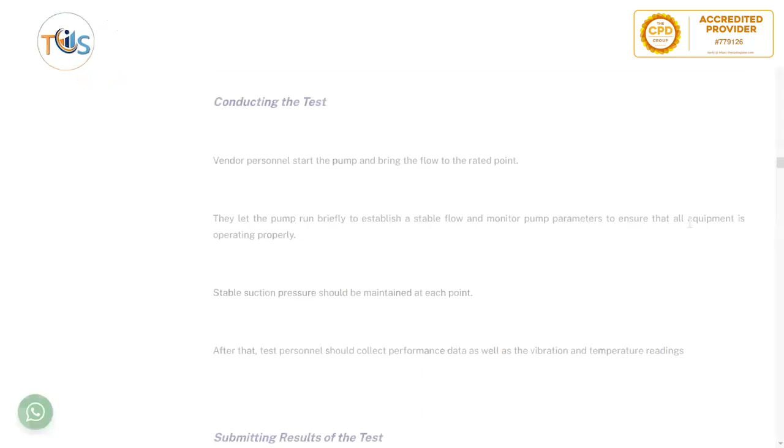Conducting the test, vendor personnel start the pump and bring the flow to the rated point. They let the pump run briefly to establish a stable flow and monitor pump parameters to ensure that all equipment is operating properly. Stable suction pressure should be maintained at each point. After that, test personnel should collect performance data as well as the vibration and temperature readings.

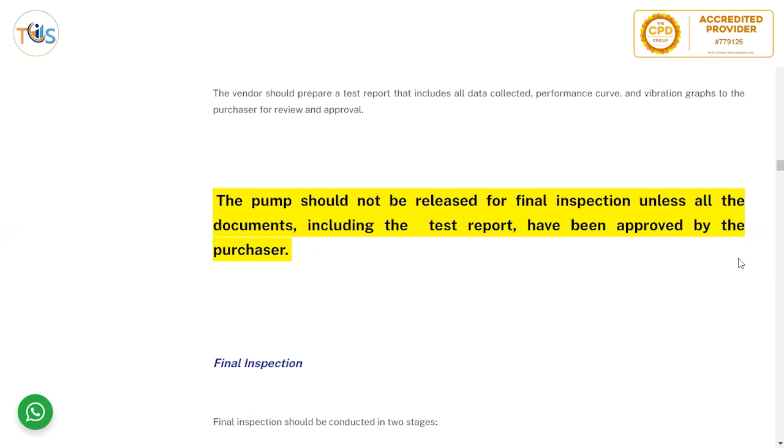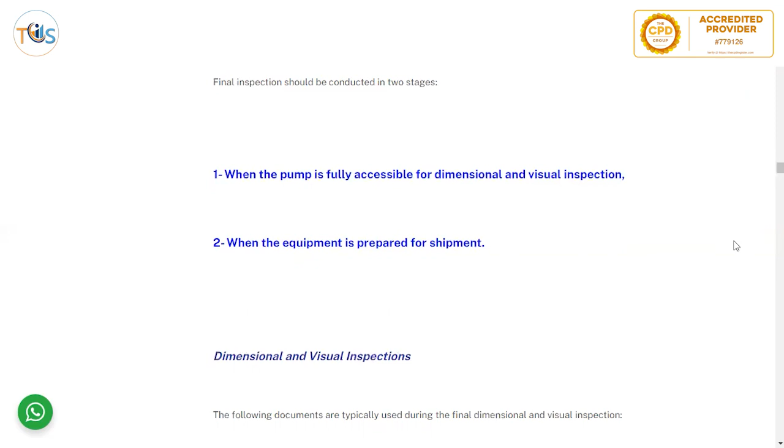Submitting results of the test, the vendor should prepare a test report that includes all data collected, performance curve and vibration graph to the purchaser for review and approval. The pump should not be released for final inspection unless all the documents, including the test reports, have been approved by the purchaser. And final inspection should be conducted in 2 stages: 1, when the pump is fully accessible for dimensional and visual inspection, and 2, when the equipment is prepared for shipment.

The following documents are typically used during final dimensional and visual inspection: data sheet, pump train general arrangements, auxiliary pump general arrangement, P&ID, process and instrumentation diagram, bill of material for seal reservoir, LOS, seal, driver, junction boxes, packing list.

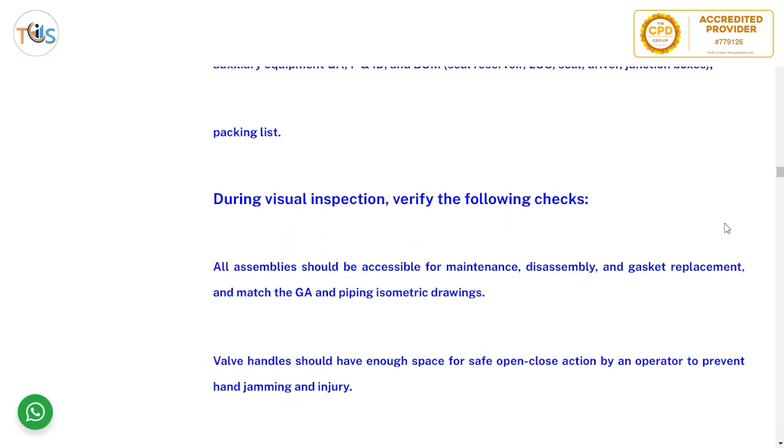During visual inspection, verify the following checks. All assemblies should be accessible for maintenance, disassembly, and gasket replacement, and match the general arrangement and piping isometric drawings. Valve handles should have enough space for safe open-close action by an operator to prevent hand jamming and injury. All equipment should be mounted securely and according to the drawing. Workmanship of installation, welding, wiring should be without visible defects and comply with standards.

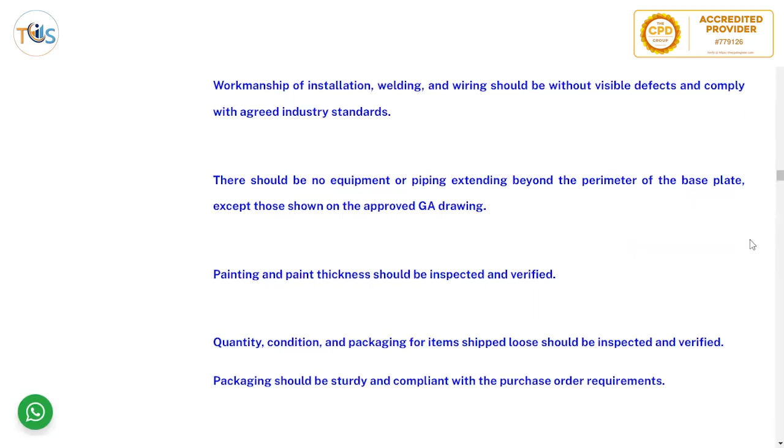There should be no equipment or piping extending beyond the perimeter of the base plate, except those shown on the approved GA drawing. Painting and paint thickness should be inspected and verified. Quantity, condition, and packing for the items shipped loose should be inspected and verified. Packing should be sturdy and compliant with the purchase order requirement.

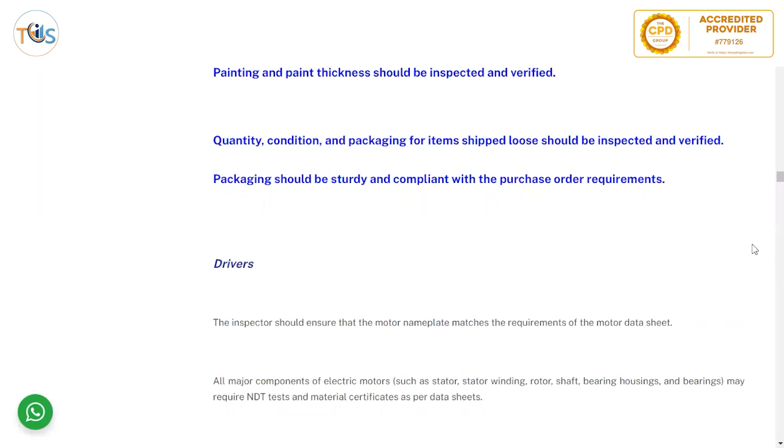For drivers, the inspector should ensure that the motor nameplate matches the requirement of the motor data sheet. Major components of electrical motors such as stator winding, rotor, shaft, bearing housing and bearing may require NDT and material certificates as per the data sheet. Ensure that material certificates and NDT reports have purchaser approval.

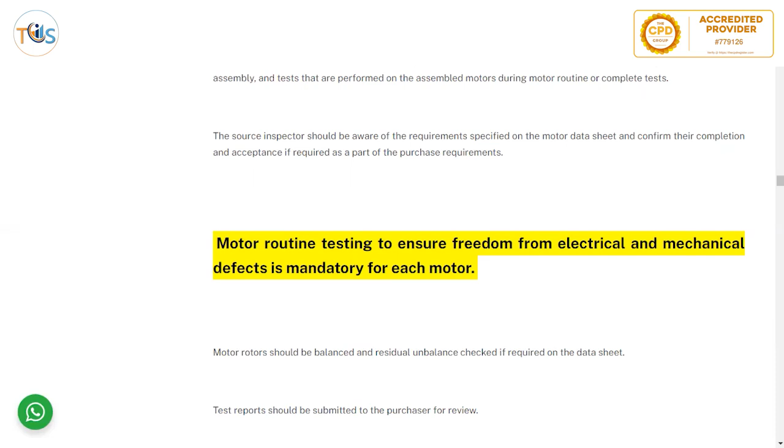There are electrical insulation tests that are performed on motor parts such as stators and windings before the motor assembly, and tests that are performed on the assembled motor during motor routine or complete test. The source inspector should be aware of the requirements specified on the motor data sheet and confirm their completion and acceptance if required as part of the purchase requirement. Motor routine testing to ensure freedom from electrical and mechanical defects is mandatory for each motor. So each motor needs to be tested.

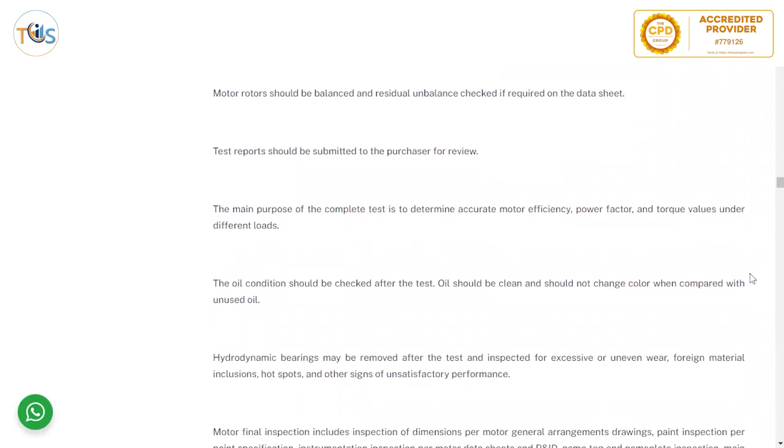Motor rotor should be balanced and residual unbalance checked if required on the data sheet. Test reports should be submitted to the purchaser for review. The main purpose of the complete test is to determine accurate motor efficiency, power factor, and torque values under different loads. The oil condition should be checked after the test. Oil should be clean and should not change color when compared with unused oil. Hydrodynamic bearings may be removed after the test and inspected for excessive or uneven wear, foreign material inclusion, hot spots, and other signs of unsatisfactory performance.

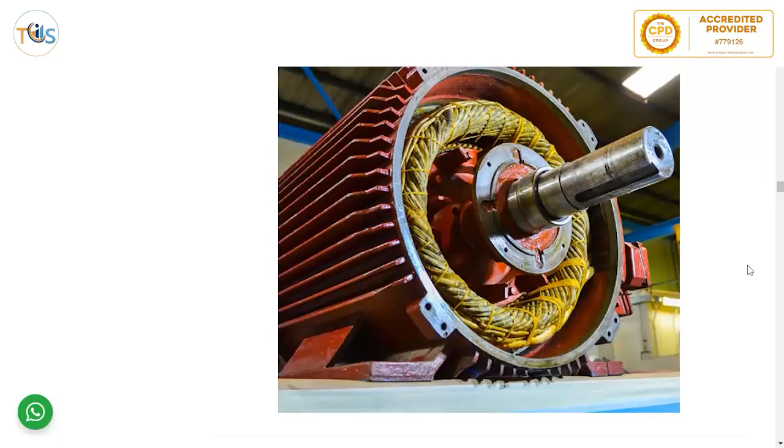And motor final inspection includes inspection of dimensions per the motor GA drawing, paint inspection, instrumentation inspection per motor data sheet and P&ID, name tag, nameplate inspection, main terminal. So here this shows the shaft of a motor plus the stator and rotor and the casing in the electric motor.

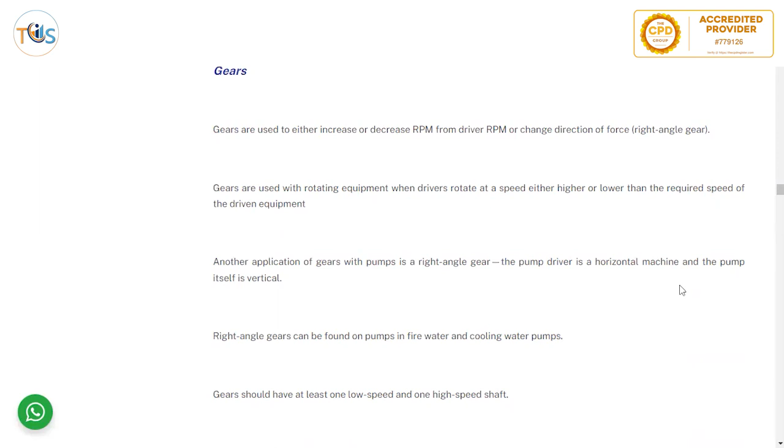Gears are used to either increase or decrease RPM from driver RPM or change direction of force. So they just sort of synchronize or direct the force of the pump. Gears are used with rotating equipment when drivers rotate at a speed either higher or lower than the required speed of the driven equipment. Another application of gears with pumps is the right angle gear. The pump driver is a horizontal machine and the pump itself is vertical. For example, right angle gears can be found on fire water and cooling water pumps.

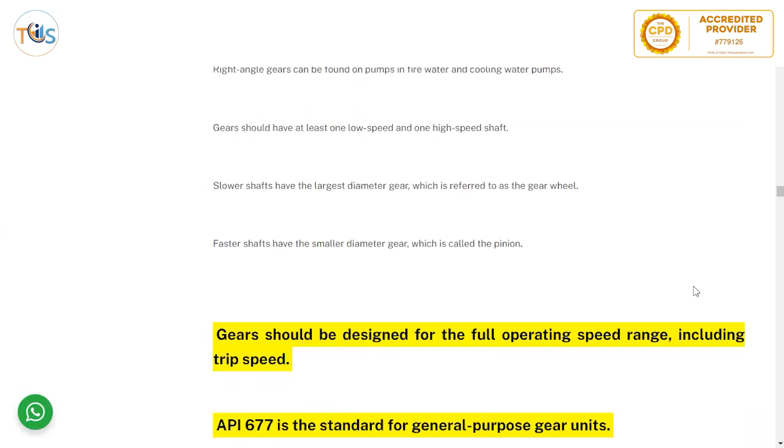Gears should have at least one low speed and one high speed shaft. Slower shafts have the largest diameter gear, which is referred to as the gear wheel. Faster shafts have a smaller diameter, which is called a pinion. So that's why they got wheel and pinion, the gears. Gears should be designed for the full operating speed range, including trip speed, and API 677 is the standard for general purpose gear units.

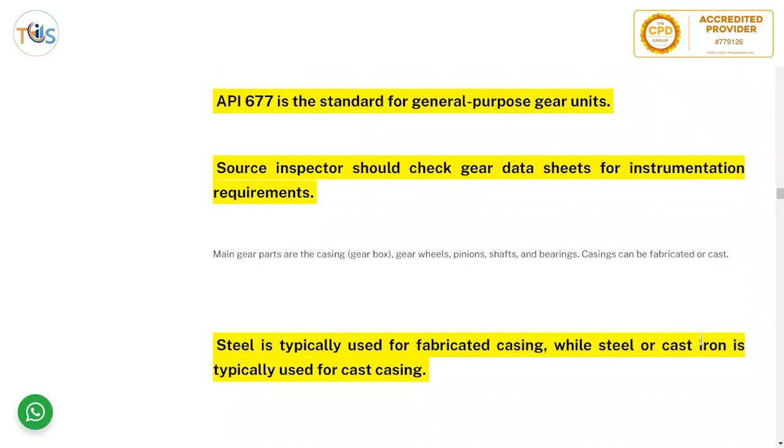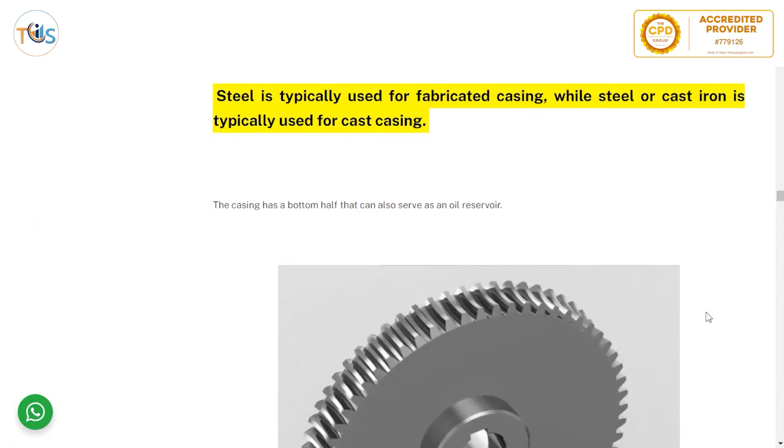Source inspector should check gear data sheets for instrumentation requirements, and main gear parts are casing, gearbox, gear wheels, pinions, shafts, and bearings. Casings can be fabricated or cast. Steel is typically used for fabricated casing, while steel or cast iron is typically used for cast casing. The casing has a bottom half that can also serve as an oil reservoir.

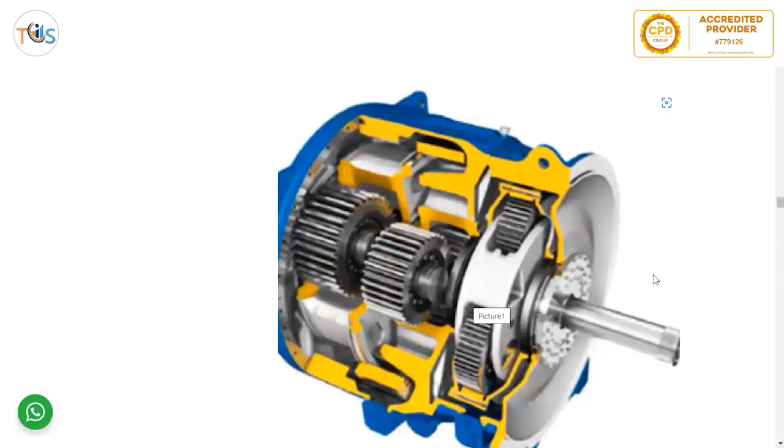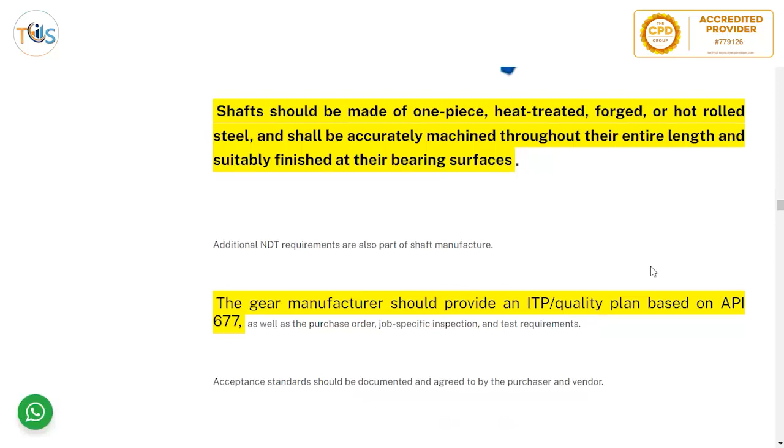Gear casing should be given a fluid fill leak check to test for oil tightness, and gear pressure lube oil system components should be given a hydrostatic test. The typical gearbox shaft should be made of one piece, heat treated, forged or hot rolled steel, and shall be accurately machined throughout the entire length and suitably finished at their bearing surface. Additional NDT requirements are also part of shaft manufacture.

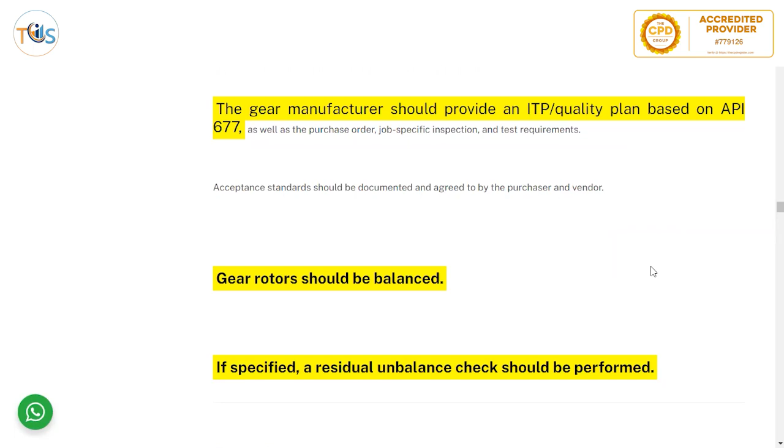Gear manufacturer should provide an ITP quality plan based on API 677, as well as the purchase order, job-specific inspection, and test requirements. Acceptance standards shall be documented and agreed by the purchaser and vendor. Gear rotors shall be balanced like a pump rotor. If specified, a residual unbalance check should be performed.

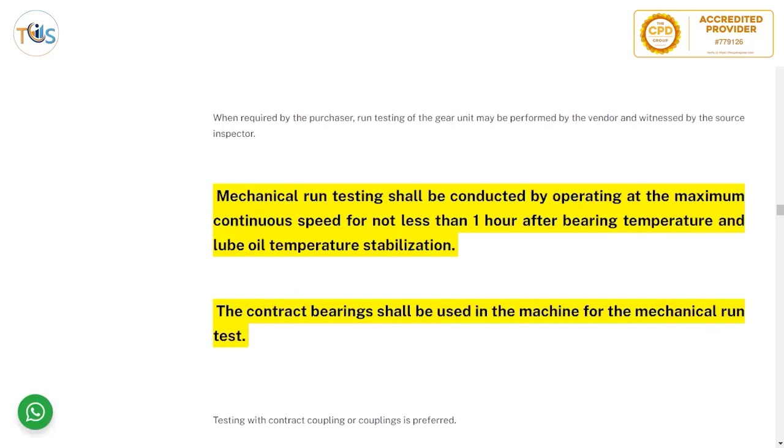Testing of gear. Mechanical run testing shall be conducted by operating at the maximum continuous speed for not less than 1 hour after bearing temperature and lube oil temperature stabilization. The contract bearings shall be used in the machine for the mechanical run test. Testing with contract coupling is preferred. During the run test, the mechanical operation of all equipment being tested shall be within the defined limits.

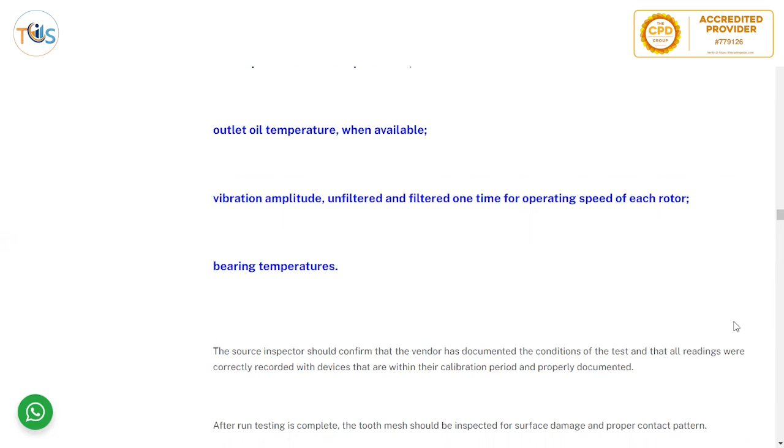The vendor shall keep a detailed log of the final test, making entries at every 15 minute interval for the duration of the gear test. Each entry shall record the following: oil inlet temperature, inlet pressure, outlet oil temperature, vibration amplitude, and bearing temperature. The source inspector should confirm that the vendor has documented the conditions of the test and that all readings were correctly recorded with devices that are within calibration period.

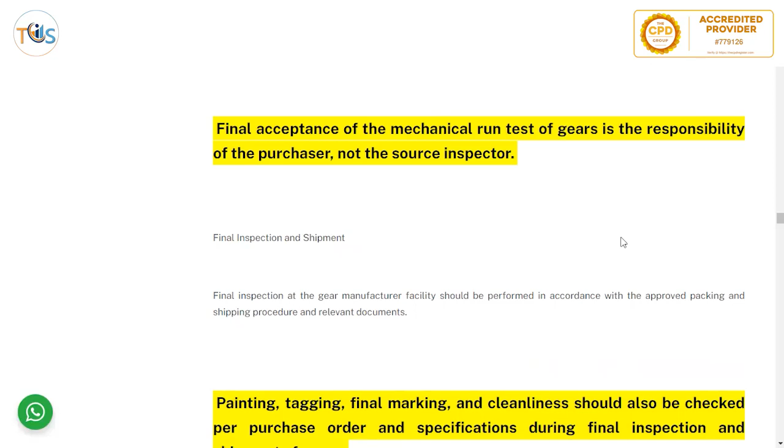After the run test is complete, the tooth mesh shall be inspected for surface damage and proper contact pattern using a blue dye, for example. When spare gear elements are ordered, each spare element should have a mechanical run test. So remember, the spare also gets a mechanical run test, and final acceptance of the mechanical run test of the gear is the responsibility of the purchaser, not the source inspector. So remember that you are not, as a source inspector, approving the mechanical run test.

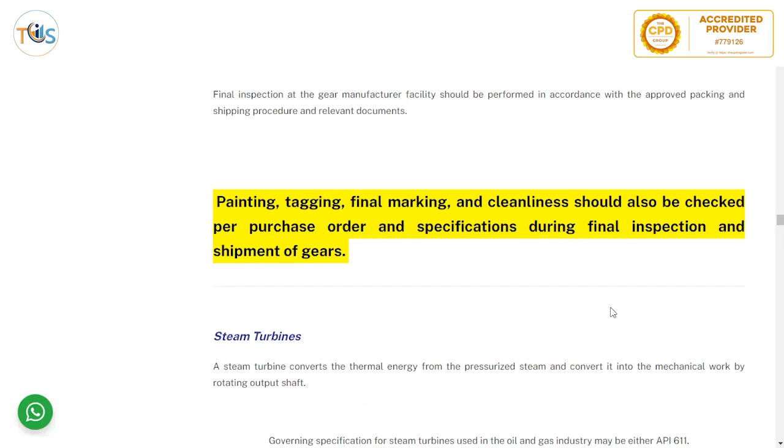Final inspection and shipment. Final inspection at the gear manufacturer facility should be performed in accordance with the approved packing and shipping procedure and relevant documents. Painting, tagging, final marking, and cleanliness should also be checked per purchase order and specification during final inspection and shipment of gears.

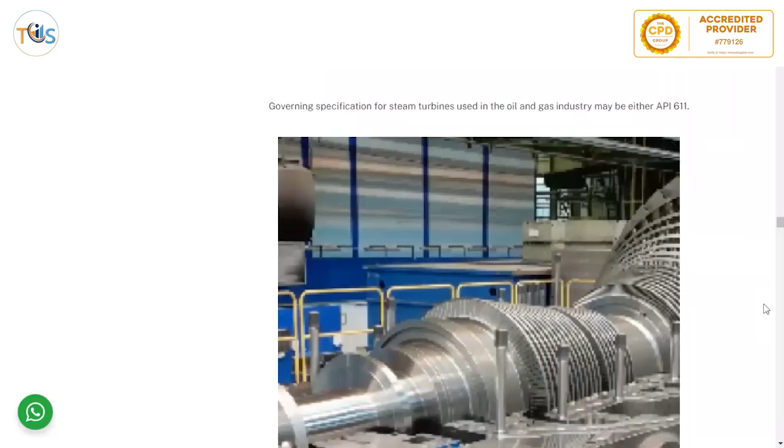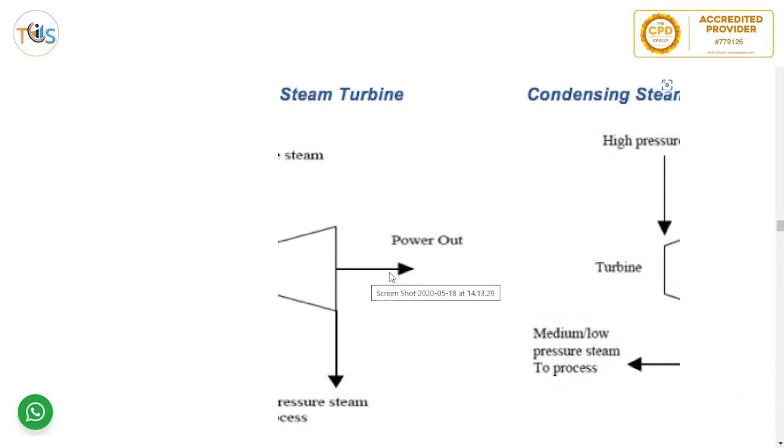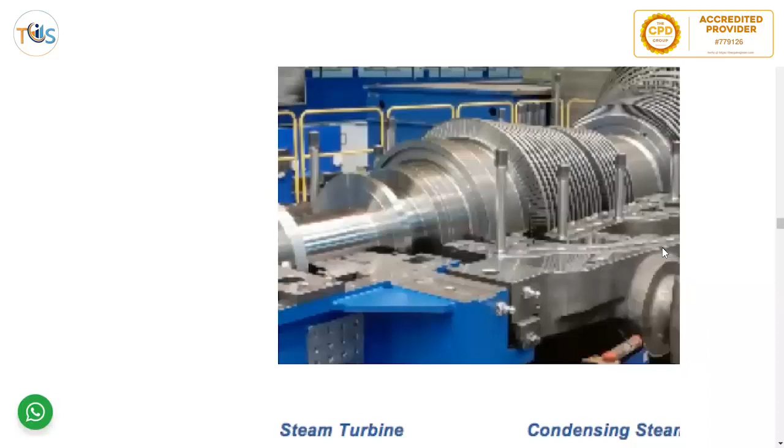Steam turbines. A steam turbine converts the thermal energy from pressurized steam into mechanical work by rotating an output shaft. The governing specification of steam turbines used in the oil and gas industry may be API 611. As you can see, the turbine works the reverse of a pump. So it is actually using pressurized steam and converting it to mechanical work. It's the other way around. So that's the steam turbine.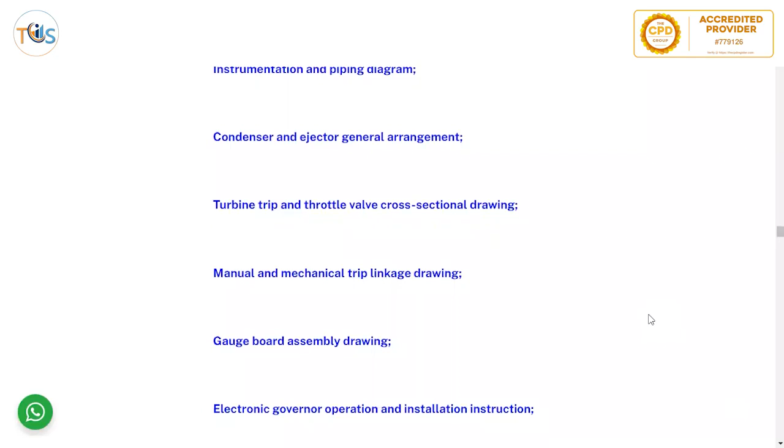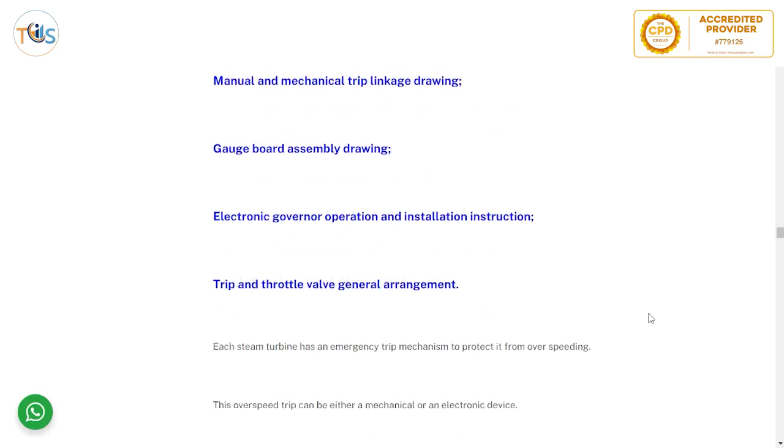The steam turbine vendor should provide the following documents that would be used during the final inspection: GA drawing, steam turbine datasheet, performance characteristic curve, instrumentation and piping diagram, condenser and ejector general arrangement, turbine trip and throttle valve cross-sectional drawing, manual and mechanical trip linkage drawing, gauge board assembly, electronic governor operation, trip and throttle valve general arrangement.

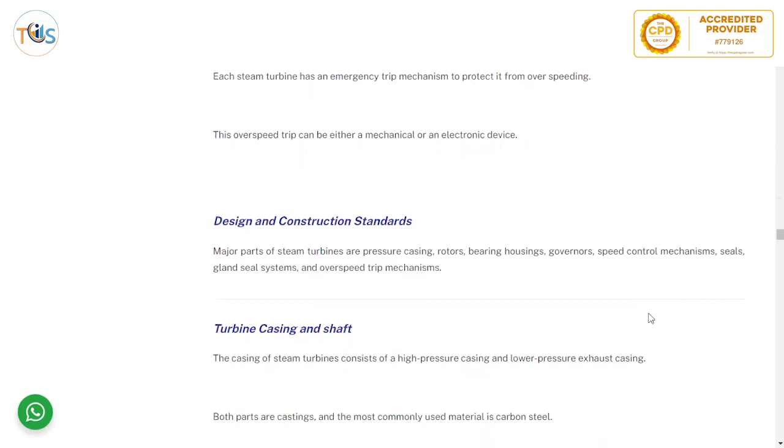Each steam turbine has an emergency trip mechanism to protect it from overspeeding. The overspeed trip can be either a mechanical or an electronic device. Design and construction standards. Major parts of a steam turbine are pressure casing, rotors, bearing housing, governors, speed control mechanism, seals, gland seal system, and overspeed trip mechanism.

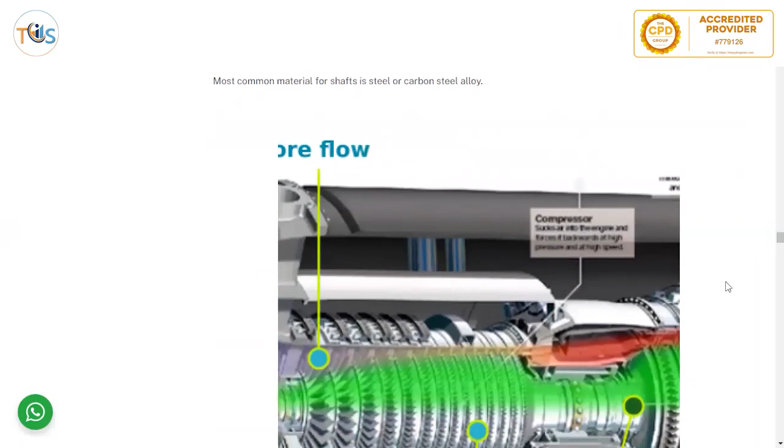The casing of steam turbines consists of a high pressure casing and lower pressure exhaust casing. For both casings, the most commonly used material is carbon steel. And the most common material for the shaft is steel or carbon steel alloy.

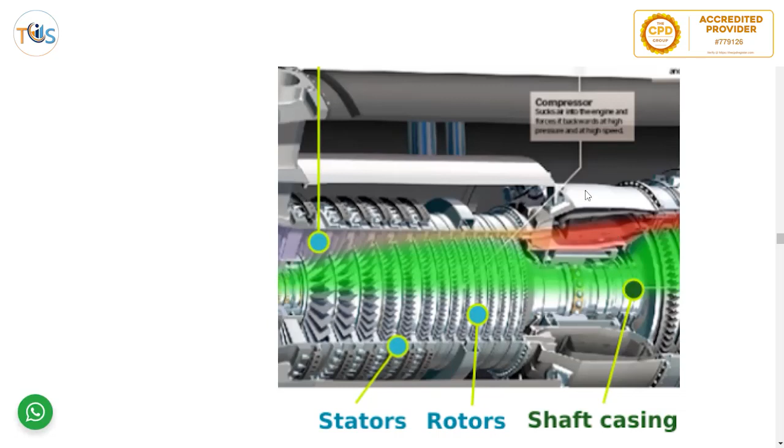As you can see here, this is a stator and rotor. One is stator, the other is rotor. This shows several stages, and then you have the whole casing that covers the entire steam turbine.

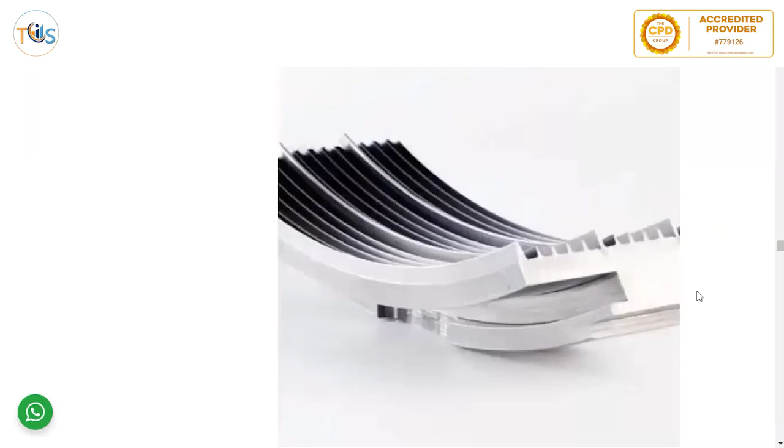Seals and packing. You can see here a close view of the seals. There are 3 or 4 different seals, one after another, for more reliability, and a carbon ring. This is another view of the seals and rings.

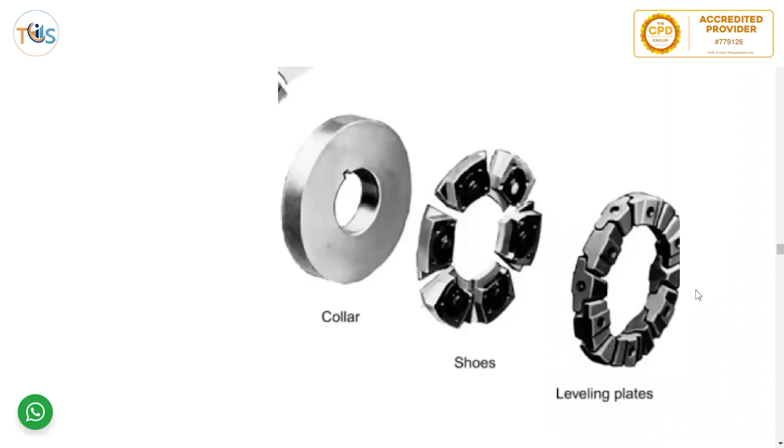And then you see a shoe and leveling plate. It's like a clutch in a machine, in a car.

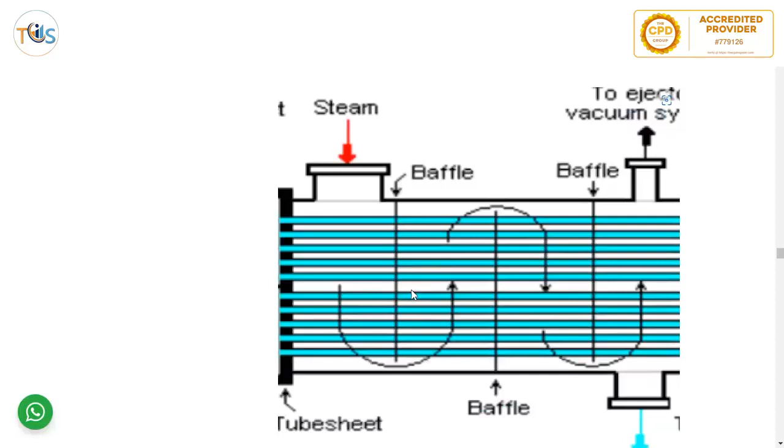Also here you see a condenser. It's like a heat exchanger with tubes. Steam comes in and then goes out from here, and the heat is absorbed here.

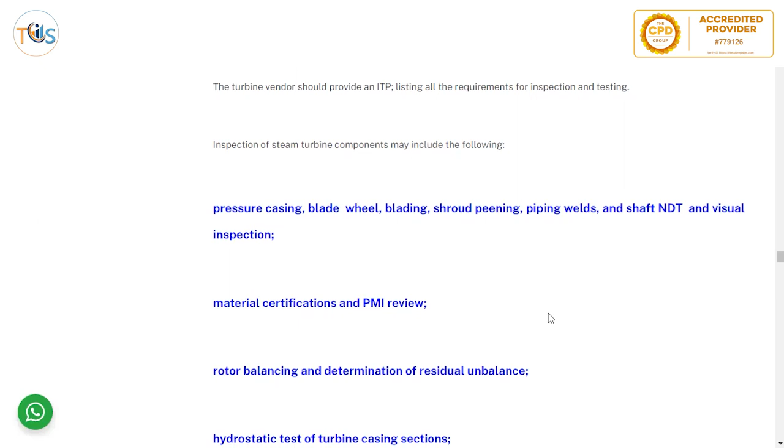Component inspection: the turbine vendor should provide an ITP listing all requirements for inspection and testing. This may include pressure casing, blades, wheel, all blading, shroud peening, piping welds, shaft and visual inspection, material certification, rotor balancing, hydrostatic test, cleanliness inspection of the assembled steam turbine, and auxiliary equipment inspection such as condenser and ejectors.

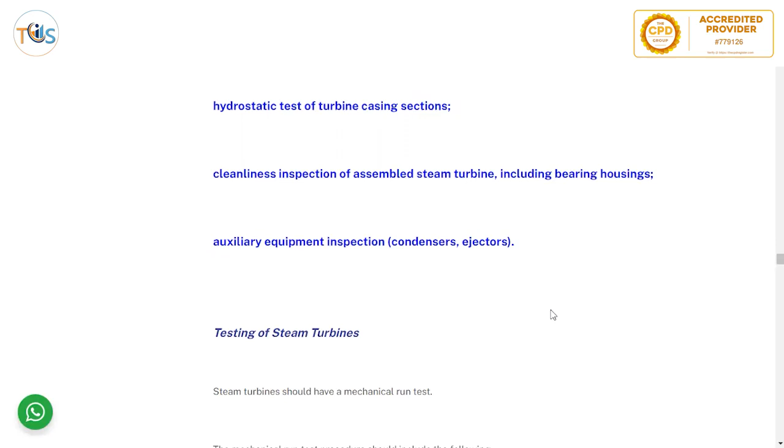Testing of steam turbines should include a mechanical run test. The procedure for the mechanical run test shall include the selected running speed set by the governor. The turbine is tripped when running speed exceeds the maximum trip speed.

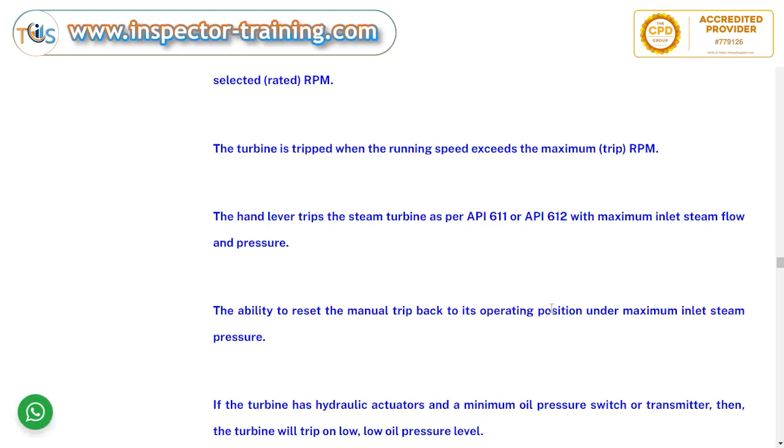The hand lever trips the steam turbine as per 611 or 612 with maximum inlet steam flow and pressure, and should have the ability to reset the manual trip back to its operating position under maximum inlet steam pressure.

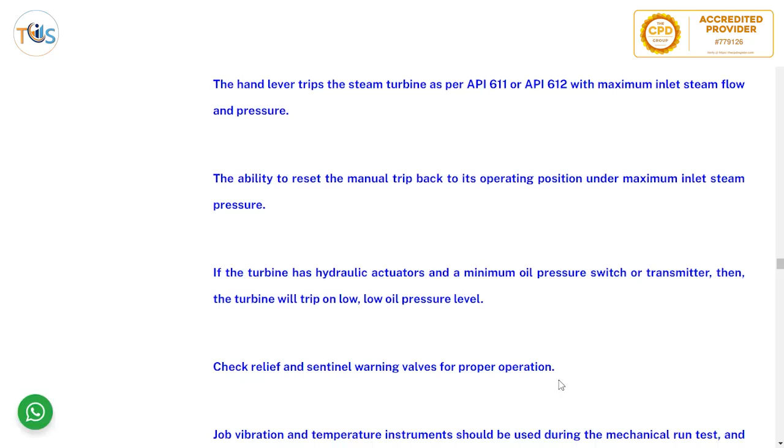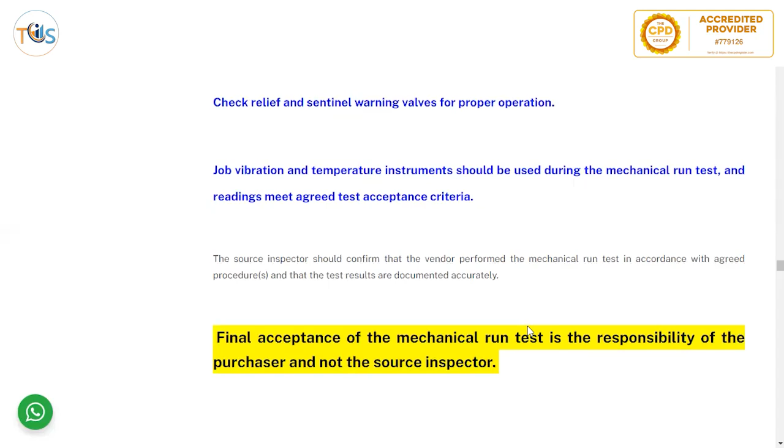If the turbine has a hydraulic actuator with minimum oil pressure, the turbine will trip on low oil pressure level. Check relief and sentinel warning valves for proper operation. Vibration and temperature instruments should be used during the mechanical run test.

Acceptance of the mechanical run test is the responsibility of the purchaser, not the source inspector.

The following documents are usually required for steam turbine final inspection: data sheet, P&ID, bill of materials, instrument list, general arrangement, packing list, shipment and preservation procedure.

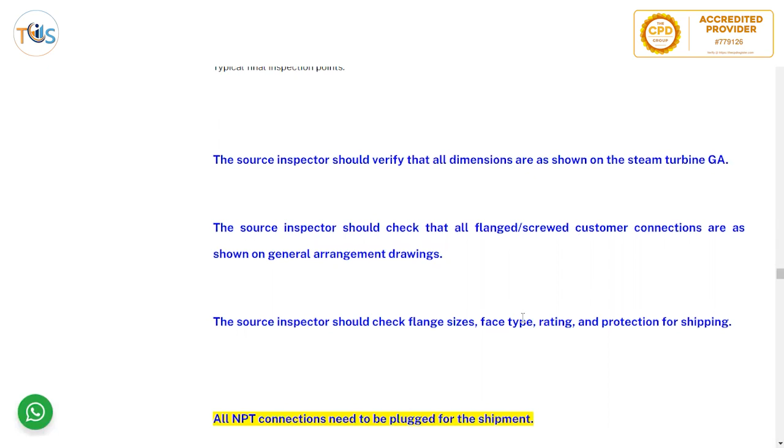Typical inspection points: verify all dimensions according to the GA, check all flange screwed customer connections as shown on the GA, check flange sizes, type, rating, and protection for shipping, and ensure connections are plugged for shipment.

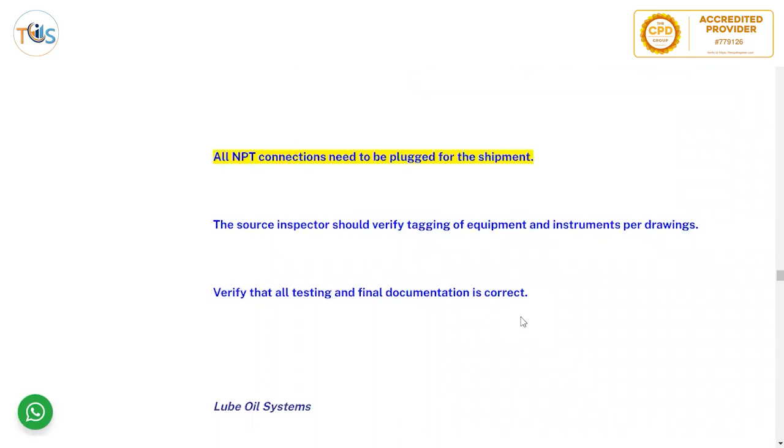The source inspector should verify tagging of equipment and instruments per drawings, and verify that all testing and final documentation is correct.

Lube oil systems for pumps and their drivers should be designed as per API 614. Each system consists of a reservoir, pump, cooler, filter, connecting piping, pressure controlling valves, safety valves, temperature control valves, pressure and temperature measurement instruments, oil level measurement instruments, indicator gauge panel, termination box, and mounting base plate.

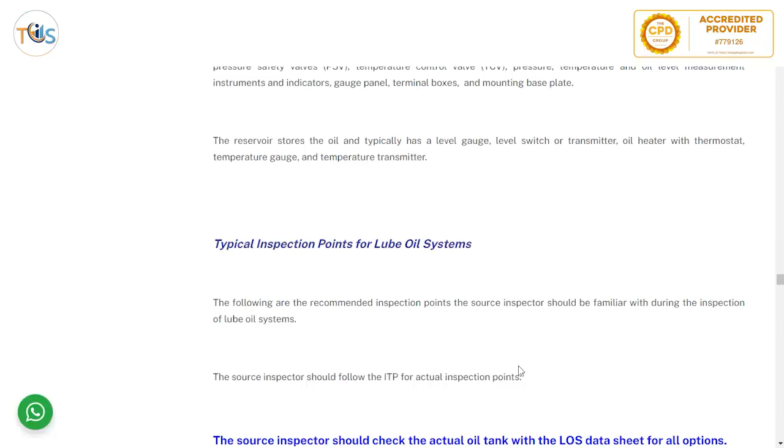The reservoir stores the oil and typically has a level gauge, level switch or transmitter, oil heater with thermostat, temperature gauge, and temperature transmitter. These are the typical inspection points for the lube oil system that the source inspector should be familiar with.

During inspection of the lube oil system, the source inspector should follow the ITP for actual inspection points, checking the oil tank against the LOS datasheet, the lube oil system datasheet, for all points.

The source inspector should open the service access and make sure there is a separating screen with its bottom sloping away from the pump suction.

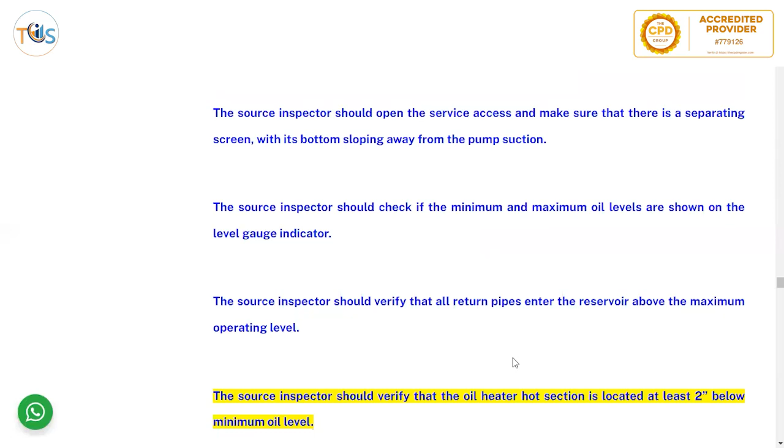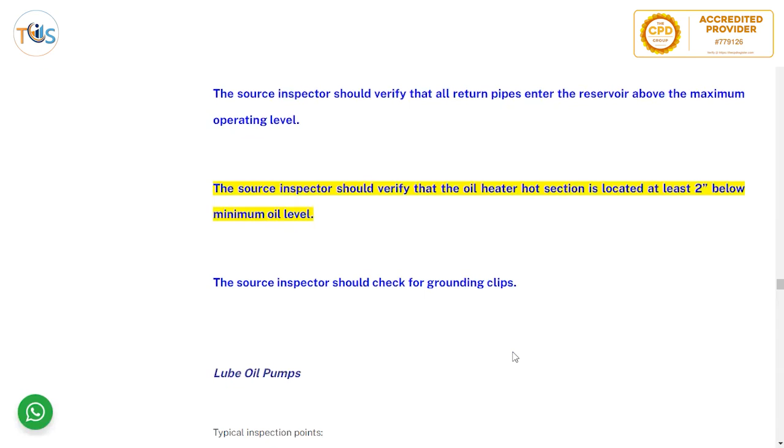The source inspector should verify that the oil heater's hot section is located at least 2 inches below the minimum oil level, and should check for grounding clips on the lube oil pumps.

Verify that the motor nameplate complies with the area classification, verify the setting of the pump oil pressure relief valves, and make sure the pump casing is made of steel.

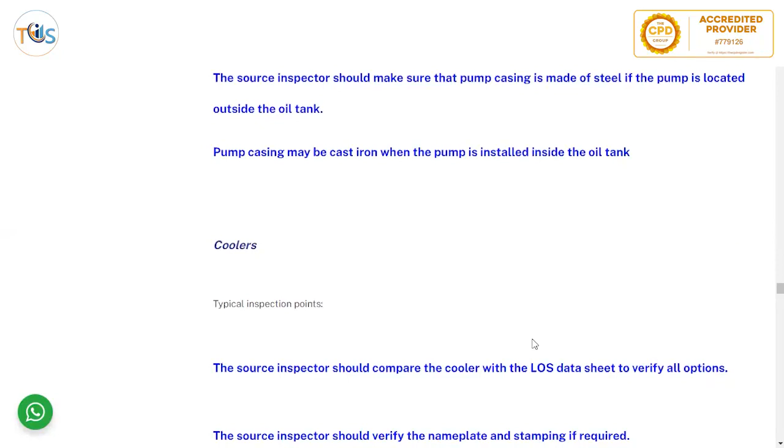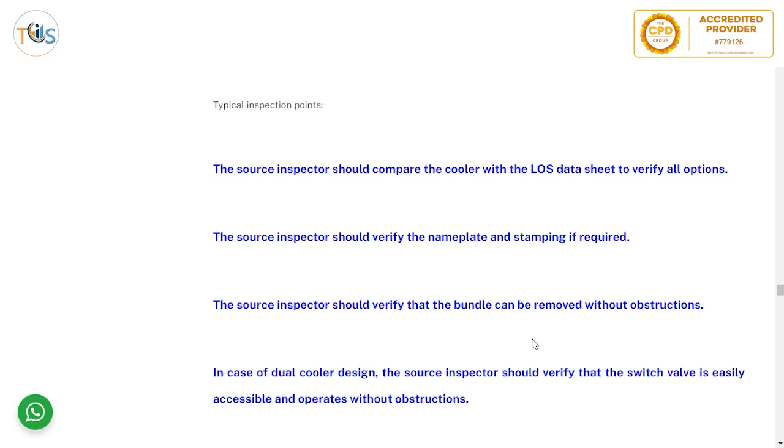For coolers, typical inspection points include comparing the cooler with the lube oil system datasheet, verifying all options, verifying nameplate and stamping, verifying if the bundle can be removed without obstruction, and in case of dual cooler design, verifying that the switch valve is easily accessible and operates without obstruction.

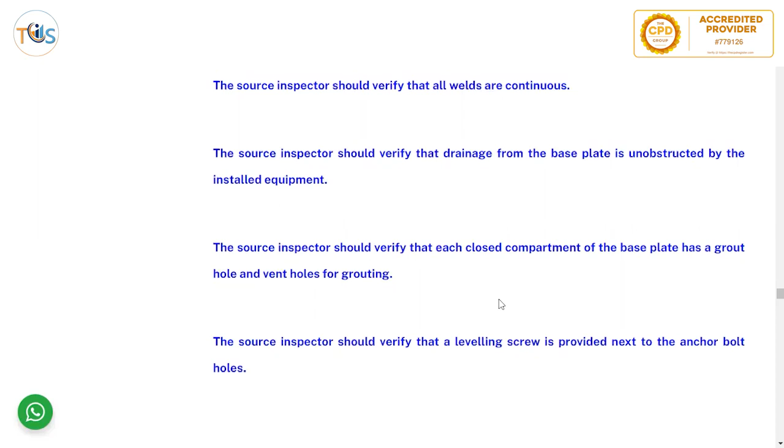For the mounting base plate, verify all welds are continuous, verify drainage from the base plate is unobstructed, verify that each closed compartment of the base plate has a grout hole and vent hole for grouting, and verify that a leveling screw is provided next to the anchor bolt holes.

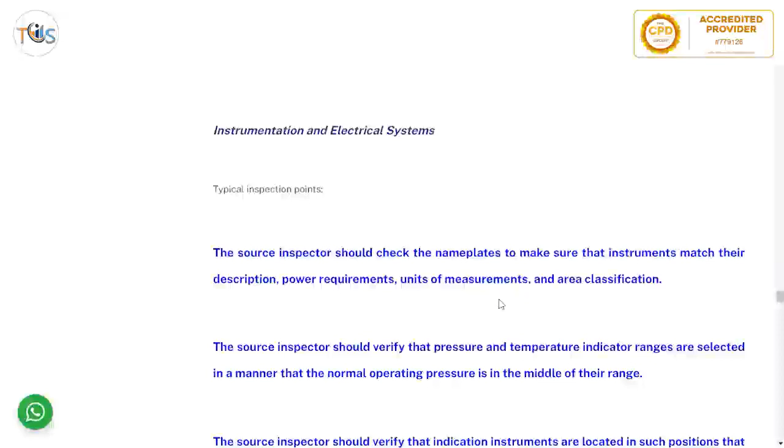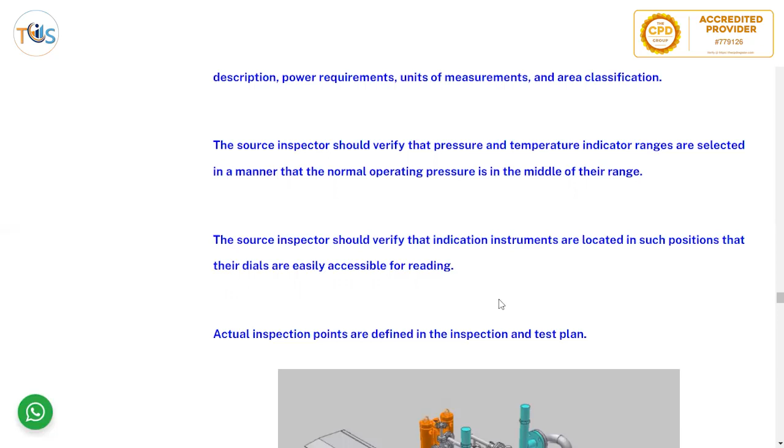For instrumentation and electrical systems, check the nameplate, verify the pressure and temperature indicators, and verify that indication instruments are located such that the dials are readily visible for reading. Actual inspection points are identified in the inspection test plan.

This is the typical lube oil system with piping, tanks, level gauge indicator, and all the connections and panels.

Performance test. Oil pressure limiting valves operate smoothly. Verify piping should be sized for full flow of the pump. Valves should not chatter, and there should be no excessive noise. Scope of supply includes the lube oil system.

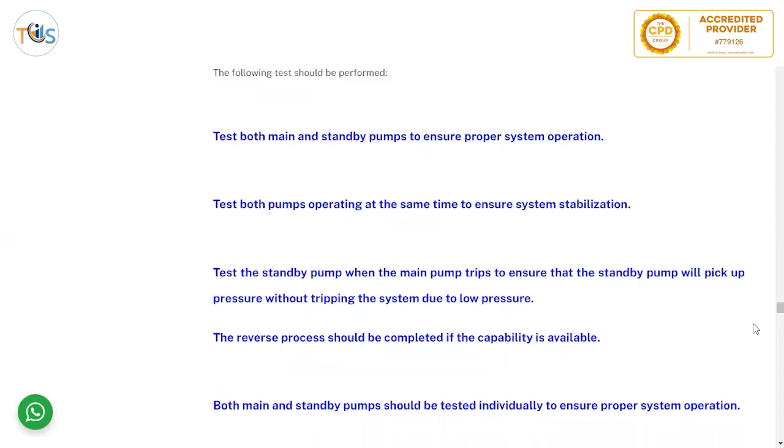Test both main and standby pumps. Test both pumps operating at the same time to ensure system stabilization. Test the standby pump when the main pump trips, to ensure the standby pump will pick up pressure without tripping the system due to low pressure.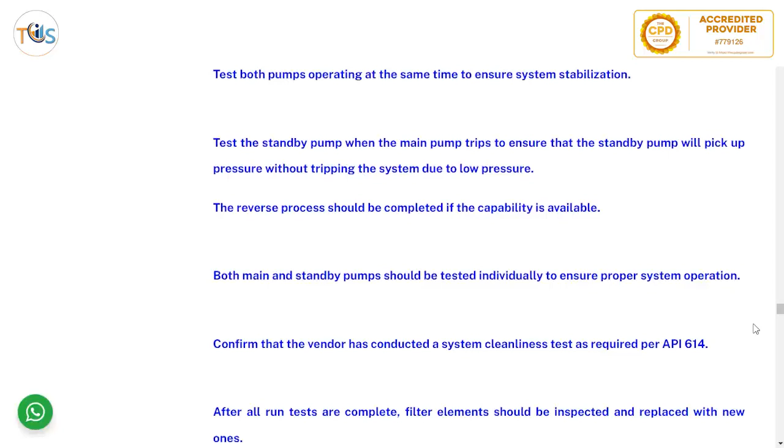Reverse process should be completed if the capability is available. Both main and standby pumps should be tested individually to ensure proper system operation.

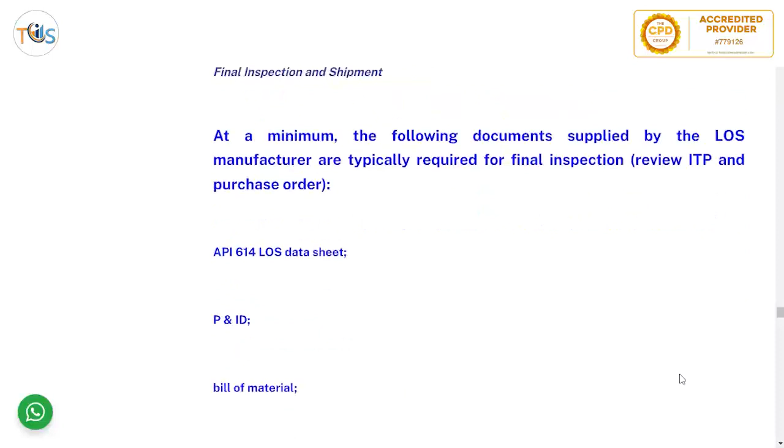Confirm vendor has conducted a system cleanliness test as per API 614. After all test runs are complete, filter elements should be inspected and replaced with new ones. Document and notify the purchaser of any changes or modifications made to any components during the oil system performance test.

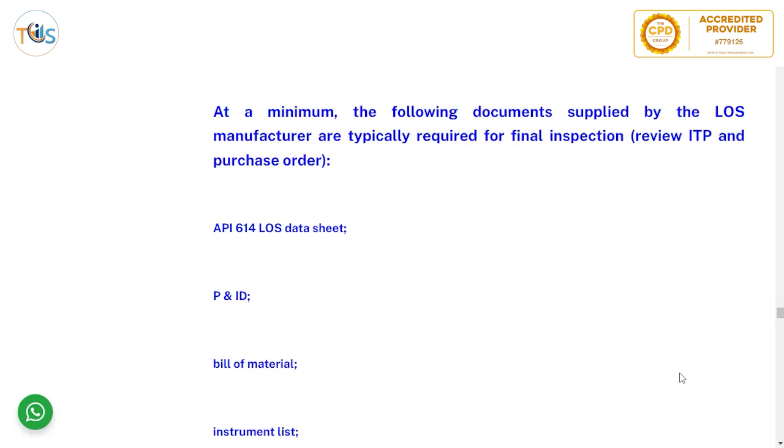Final inspection and shipment. As a minimum, the following documents supplied by the lube oil system manufacturer are typically required for final inspection. Review the ITP and purchase order.

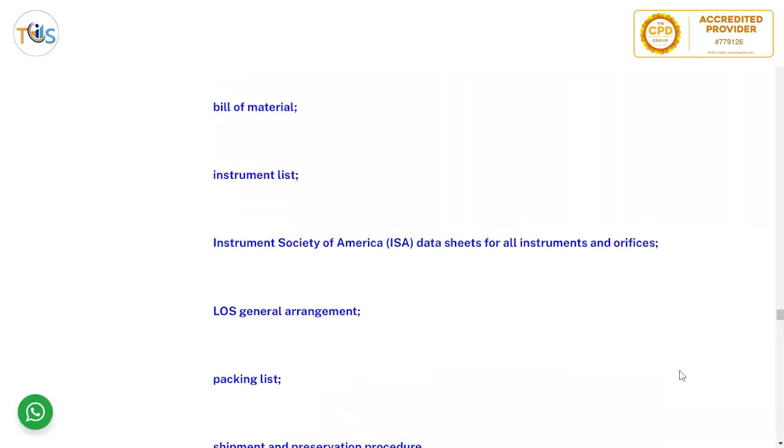API 614, lube oil system data sheets, P&ID, bill of materials, instrument list, data sheet, lube oil system general arrangement, packing list, shipping and preservation procedure.

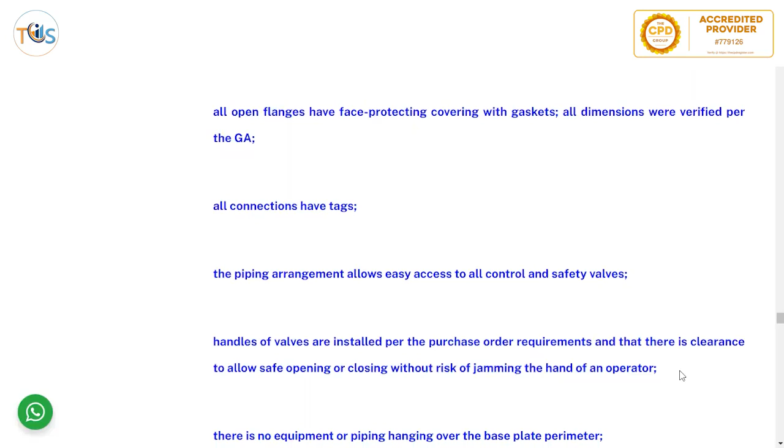Final inspection of the lube oil system should confirm that all open flange faces have face protecting covering with gaskets, all dimensions were verified per the GA, all connections have tags, and the piping arrangement allows easy access to all control and safety valves.

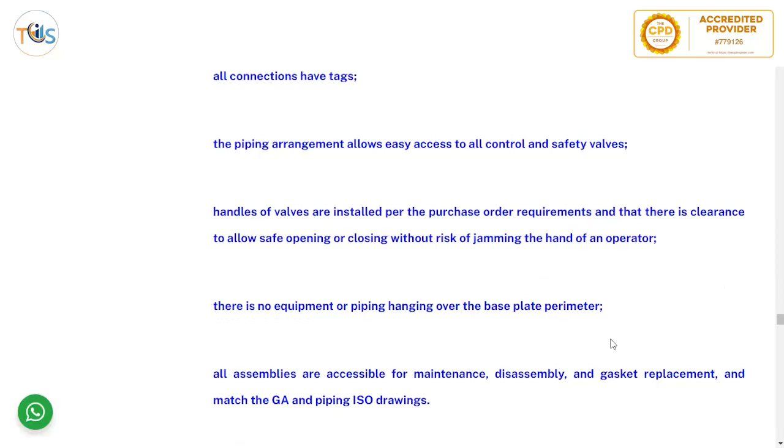Handles of valves are installed per the purchase order requirements. There is clearance to allow safe opening. No equipment or piping hangs over the base plate perimeter. All assemblies are accessible for maintenance, disassembly, and gasket replacement, and match the GA, general arrangement, and piping isometrics.

All loose items should have tags and should be listed in the packing list. Final packing should be done per an approved preservation and packing procedure.

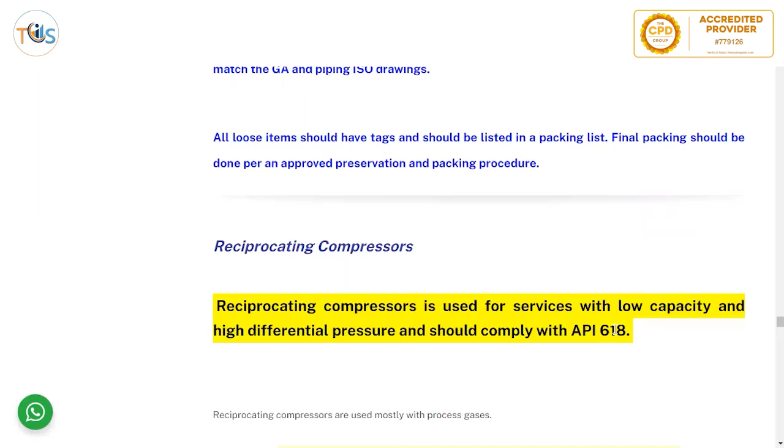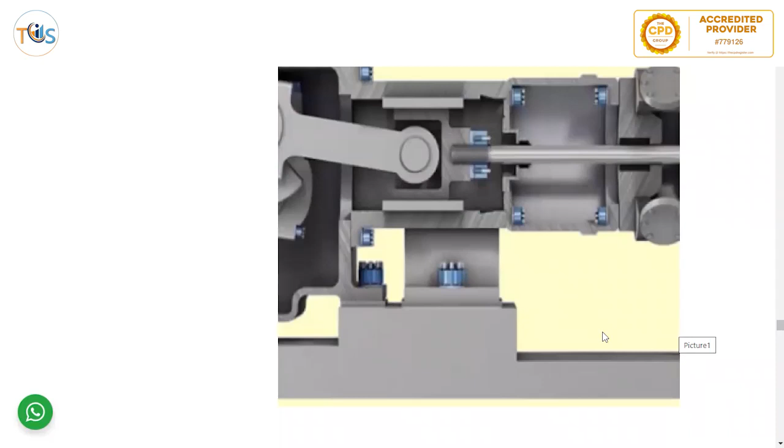Reciprocating compressor is used for services with low capacity and high differential pressure and should comply with API 618. As you can see, there is a piston, mostly used with process gases, and it's like a car engine reciprocating compressor. Special attention should be paid to materials if compressor parts shall be exposed to H2S or

sour service. In this case, the material should comply with NACE MR0175 and include all pressure containing cylinder parts or components with cylinder suction and discharge. Piston rods should be coated with wear resistant material.

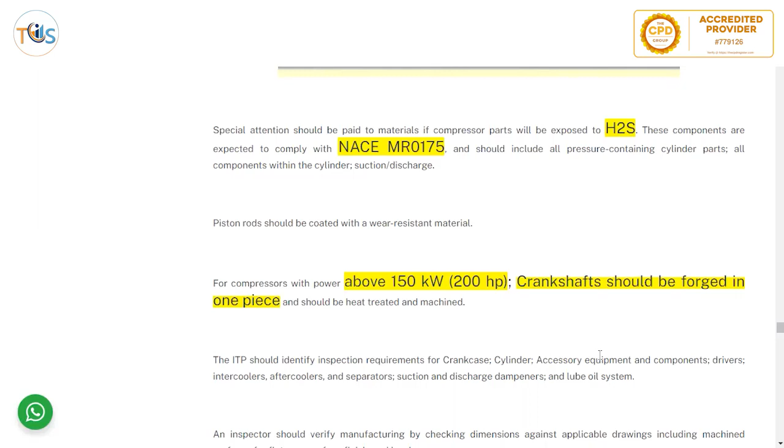For compressors with power above 150 kilowatts (200 horsepower), the crankshaft should be forged in one piece and should be heat treated and machined. The ITP should identify inspection requirements for crankcase, cylinders, accessory equipment and components, drivers, intercoolers, aftercoolers and separators, suction and discharge dampeners, and the lube oil system.

An inspector should verify manufacturing by checking dimensions against applicable drawings, including machined surfaces for flatness, surface finish, and level. The following is the list of inspection tests usually specified by the purchaser within the ITP.

PMI test on major pressure containing parts, as well as parts that are in contact with the process gas. Visual inspection of major casing, weld fabrication, and piping.

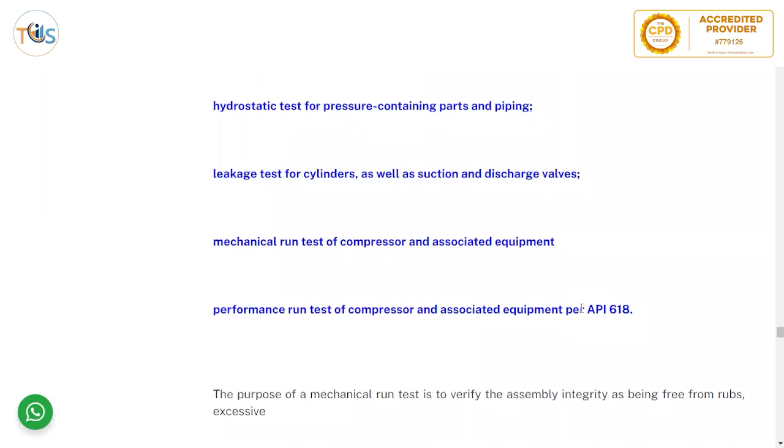Hydrostatic test for pressure containing parts and piping. Leakage test for cylinders, mechanical run test for compressors, and performance run test of compressors and associated equipment.

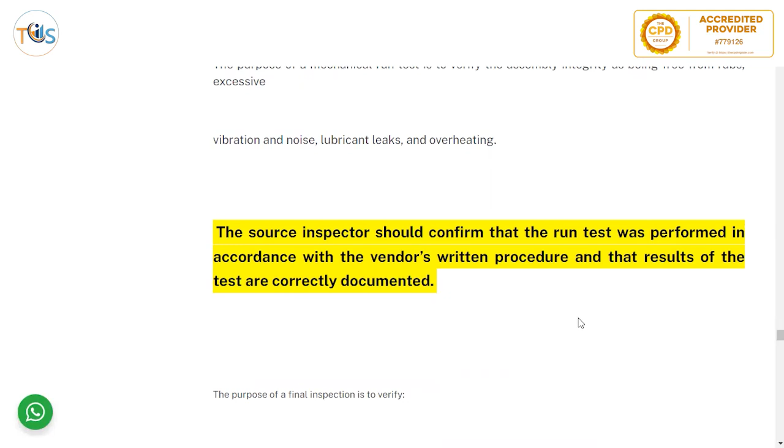The purpose of the mechanical run test is to verify the assembly integrity as being free from rubs, excessive vibration and noise, lubricant leaks, and overheating. The source inspector should confirm that the run test was performed in accordance with the vendor's written procedure, and that results of tests are correctly documented.

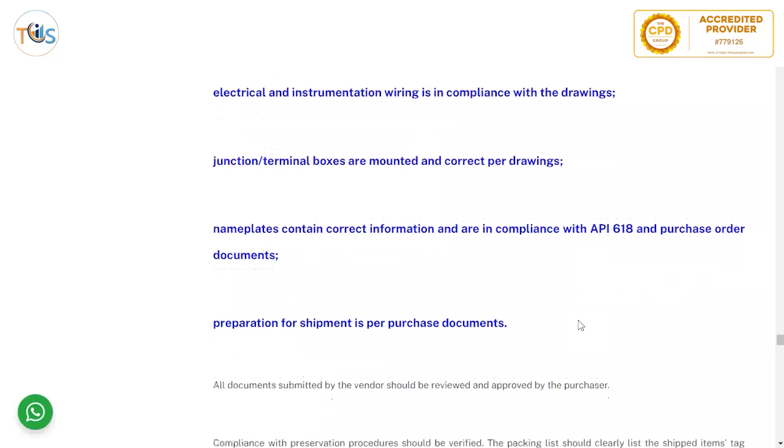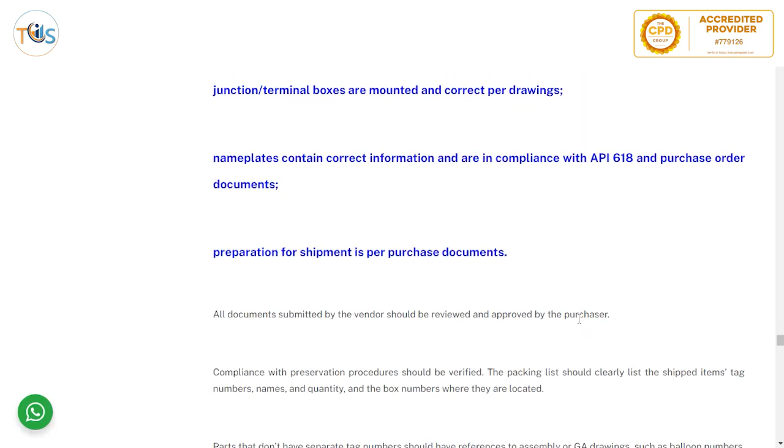The purpose of final inspection is to verify dimensions are per the compressor general arrangement, compliance with standards, instrument and connection tagging, piping compliance to P&ID, proper piping support, electrical and instrumentation wiring in compliance with the drawing, junction and terminal box mounted and correct per drawings, nameplate containing correct information, in compliance with API 618 and purchase order documents.